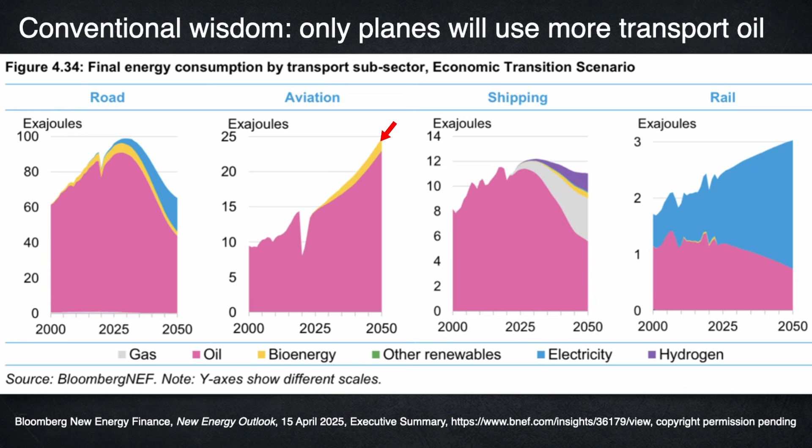So I'll explain why EP's emerging evolutionary pattern will at least closely rhyme with that of EVs just a quarter century later. That's contrary to the widely held view that aviation will use ever more oil while road, sea, and rail transport use less. In the second of these Bloomberg graphs, oil-based aviation fuel in magenta just keeps growing rapidly, and by 2050, it's only 7% displaced by bio-based sustainable aviation fuel in gold. But that projection assumes aviation fleet efficiency will rise only 8% by 2050, far slower than historically.

So let's see how to falsify this assumption and make the aviation graph look like the other three.

I'm originally a recovering physicist, but for the past quarter century, I've been a practitioner of designing super efficient vehicles, buildings, factories, and equipment. Each winter and spring quarter, through so far 15 iterations, Professor Joel Swisher and I teach an experiential course on how integrative design can make the energy efficiency resource several-fold bigger, but at much lower costs, and often with increasing returns.

That's because, as this paper shows, we use not more or fancier widgets, but fewer and simpler widgets, more artfully chosen, combined, timed, and sequenced. In 70-odd years of flying many millions of airline miles, I've also observed that airframe makers, although very skilled, could get better at integrative design.

What's their challenge? How far do airplanes need to fly? Well, long routes are scarce. Of the 2023 global emissions of aviation carbon, over half came from short trips on narrow-body or smaller planes. That's the dominant 4 aqua bars on the left.

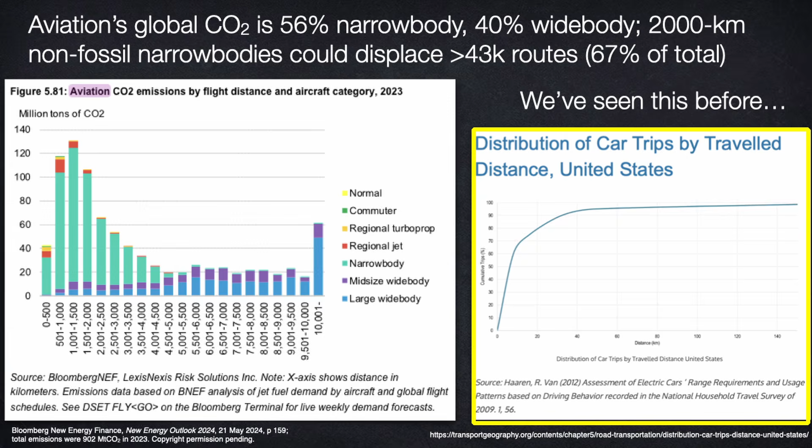The two-seat Roadster adopted electric drive in a lightweight Lotus Elise fiberglass and aluminum sports car, and that combination had an impressive 393-kilometer range, which made range a non-issue according to Car and Driver magazine.

But many customers still worried about range, and there were no fast charging networks to plug into. The 53 kilowatt-hour battery pack was also expensive. The powertrain was handmade, so in real terms, the sticker price was 4 times that of a modern 4-seat Model 3.

While providing ample range in practice to early adopters, Tesla needed time to build production volume and cut costs, and reduce the energy use per kilometer by 16% and raise the car's top range by 40% for the rare but important long-range trips, and also to store 42% more energy per battery pack kilogram.

So the dominance of short trips bought that time they needed, and now electric planes can apply the same strategy by starting with abundant short-haul markets and building out from there. However, unlike autos which ride on tires, planes need lift to stay airborne.

Most aviation experts assert that for electric flight to get off the ground, if it ever can, it will need battery packs to store 2 or 3 times more electricity per kilogram than the best battery packs in today's EVs, and yet stay safe, durable, and cheap.

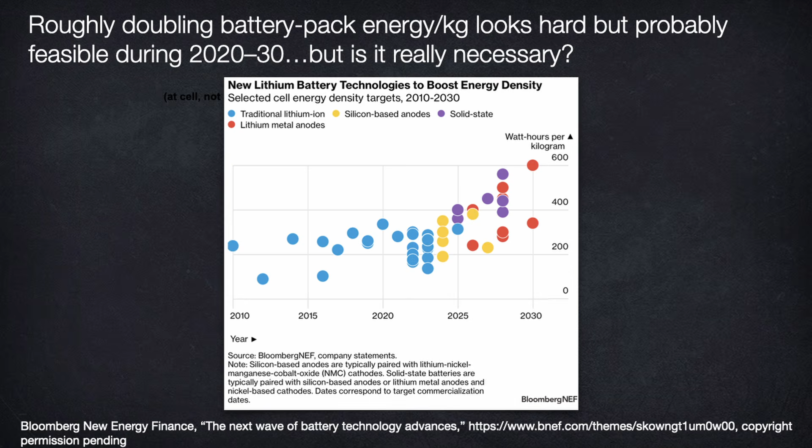That's not easy. It is authoritatively forecasted anyhow, but it comes from asking and answering, I think, the wrong question. It simplistically compares fuel with battery energy density and propulsive efficiency in today's aircraft, rather than redesigning the whole aircraft for electric propulsion. So it's a classic case of optimizing isolated components and thereby pessimizing the whole system.

But integrative whole system design of far more efficient airplanes can make the battery needs very much milder. This was explained 12 years ago in a remarkable technical paper by 2 distinguished NASA Langley aeronautical engineers. They say electric aviation propulsion has compelling differences that will fundamentally alter the way propulsion integration is approached.

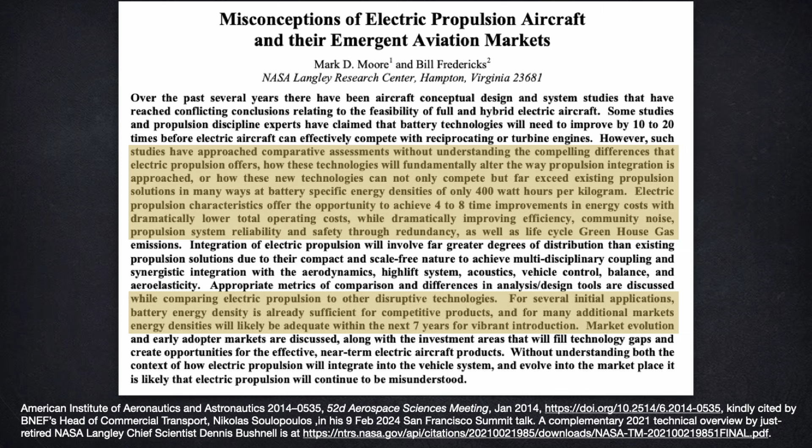Integrative design lets electric propulsion not only compete but far exceed existing propulsion solutions in many ways at battery-specific energy densities of only 400 watt-hours per kilogram, yielding 4 to 8-fold improvements in energy costs, they said, with dramatically lower total operating costs while dramatically improving efficiency, community noise, propulsion system reliability and safety, and of course, with zero greenhouse gas emissions if you power the planes with carbon-free electricity, which last year was 43% of world electricity and rising fast.

These authors also said that for several initial applications, battery energy density was already sufficient, this is 12 years ago, for competitive products in some entry markets, and for many additional markets, energy densities will likely be adequate within the next 7 years for vibrant introduction. That meant 5 years ago. So we'll see how that's going.

And they're right, because electric propulsion does not just produce thrust. It also creates new advantages, new degrees of freedom, transforming how the whole aircraft is designed. So you cannot compare propulsion systems in isolation.

The economics are also far better. The business opportunity is here and now, and thinking that it's far away risks grave disruption. I'm not implying here that battery energy density is not important, but rather that it's already adequate, as we'll see, if offset by whole aircraft improvements.

Batteries do cost and weigh more. They don't get lighter as they're drawn down. They need meticulous safety and certification.

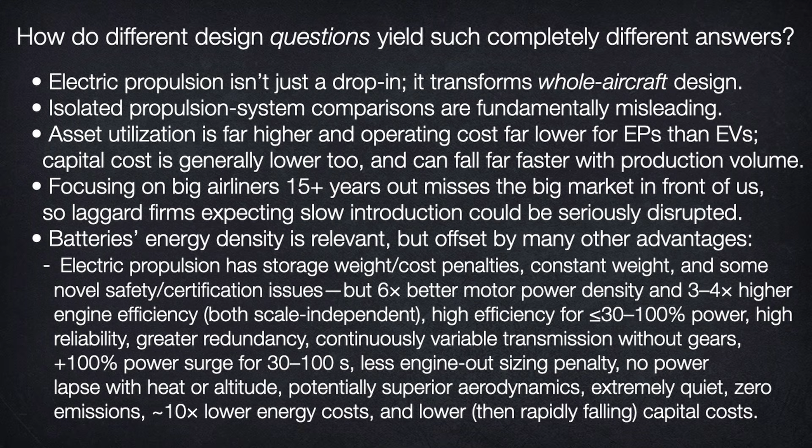However, electric propulsion has many offsetting advantages. It has a many-fold lighter weight powertrain and higher efficiency than fuels do, over a huge range of scale that invites distributed architectures, many small motors, not a few giant gas turbines.

Efficiency stays high over most of the power range. Torque rises, thrust is widely available without gears, energy for climbing can be largely recovered on descent. No combustion also means no intake air and no exhaust. Reliability and safety improve through greater redundancy, radical simplicity, and major power surge capability.

Noise and engine dependence on density altitude nearly vanish. Higher altitude is feasible. Maintenance shrinks. Emissions disappear. Energy costs, that is, price times use, fall by an order of magnitude. Capital costs shrink even more at low production volumes and can make electric airplanes better, safer, and cheaper than fueled airplanes. That's a lot of advantages.

So, bypassing technical details, I'm going to offer some simple examples and analogies illustrating this logic. And while I will address mainly energy efficiency, remember that economics merit equal emphasis.

There's a wonderful Volts interview, 19 June 24, with Dave Roberts, in which the leader of one of the best electric airplane companies called Beta, Kyle Clark, said two novel things.

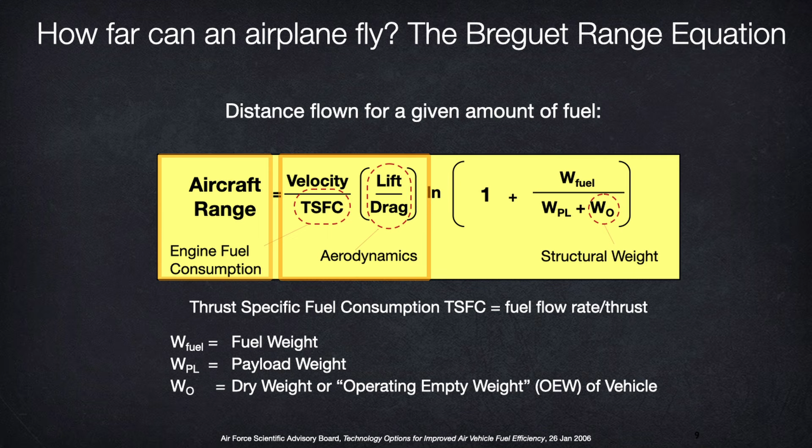Airplanes' fuel efficiency is proportional to three things: engine efficiency, which is the reciprocal of fuel use per unit thrust; aerodynamic efficiency, measured by the ratio of lift to drag; and a logarithmic term based on the ratio of fuel weight to gross weight, which is structure plus payload. That third term is needed because the plane gets lighter as it burns fossil fuel, which turns into about 6 or 8% of climate change. So putting aside fuel burn and other complexities, the three prime variables are propulsive efficiency, aerodynamic efficiency, and mass efficiency—or you might summarize as thrust, sleekness, and lightness.

However, these three all interact, sometimes favorably, often not. Their interactions are complex; they need a full systems analysis. So the many technology and design opportunities I'll mention do not simply combine in a real aircraft at the systems level, nor do they combine simply across a full mission profile that includes not just cruise, but also conditions like takeoff, landing, and maneuver. Keeping that caution in mind, now back to the story.

Planes travel about 10 times faster than cars. For both of them, aerodynamic drag rises as the square of speed. Also for both planes and cars, reducing weight is crucial. Of course the numbers differ for planes and cars, but ultralight weight plus low drag crucially enables non-fossil fueled propulsion of both kinds of vehicles.

So let's start with the automotive physics analogy, and I'm going to riff back and forth a lot between cars and planes. Just 1/5 of a modern non-electric car's fuel energy reaches the wheels and moves the car. Of that tractive load, almost half, rising as the cube of speed, heats the air that the car pushes aside, and most of the rest heats the tires and road. Only about the last 6% of the fuel energy accelerates the car and then heats the brakes when you stop.

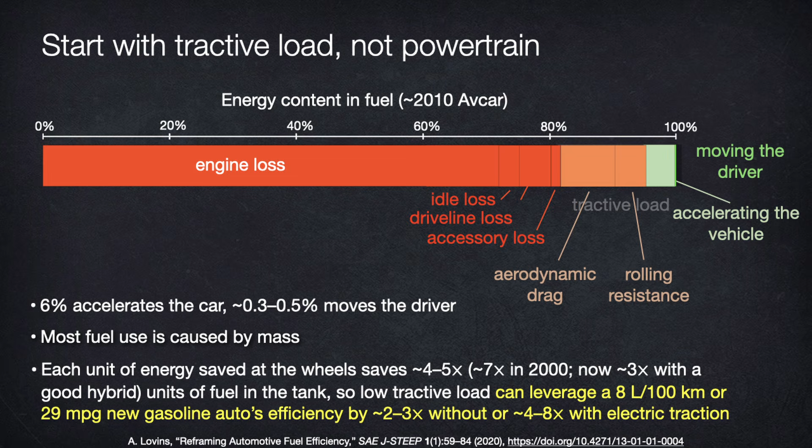Now, automakers cut losses mainly in the powertrain, where the big losses are—the red stuff. That's harder than reducing tractive load, and it's far less rewarding, because saving 1 unit of energy in the powertrain saves only 1 unit of fuel in the tank. In contrast, saving 1 unit of energy at the wheels avoids 3 or 4 additional units lost in getting that energy to the wheels, so you're leveraging 4 or 5 units of fuel saved at the tank.

Thus, we can double or triple efficiency in a fueled car without changing how it's propelled, or we can roughly quadruple to octuple efficiency by combining low tractive load with electrification. The Electric Power Research Institute found that making EVs more efficient before they're electrified can cut U.S. costs of electricity, grid, and recharging infrastructure by more than $200 billion a year. So we should first reduce tractive load, then improve the powertrain, and then the powertrain shrinks for the same acceleration—F equals ma, less m, less a. That saves more mass, and it also saves capital cost to help pay for the lightweighting.

How can that lovely synergy work in practice? Well, let's look at the carbon fiber car that I drive. It is 55 kilograms lighter than a 2-seat 2009 Tesla Roadster. It was profitable from the first unit that BMW sold in 2013, and for all 250,000 units sold over the next 9 years, including mine. It's made from carbon fiber, which automakers had rejected as far too costly.

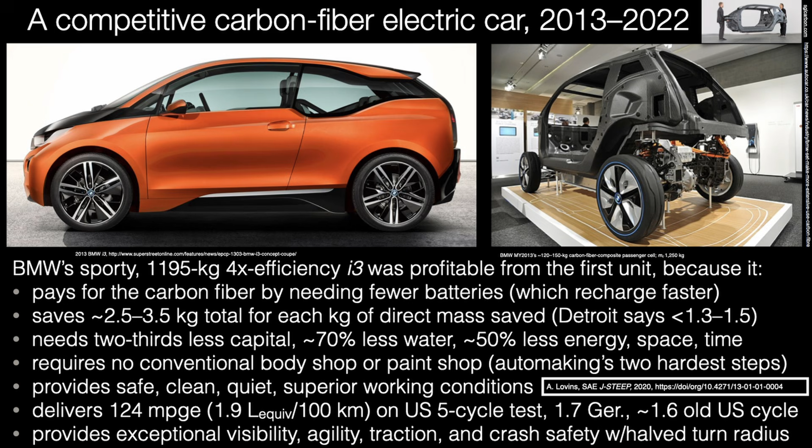But its carbon fiber was paid for by needing fewer batteries, the most expensive part of an EV, to move less mass. Also, fewer batteries recharge faster and need less electricity and less infrastructure. So the roughly 300 kilograms of saved weight then snowballed spectacularly, saving about 1.5 to 2.5 kilograms of secondary weight for each kilogram of saved primary weight. Part of that, of course, is the saved batteries.

The assembly of this car saves 2/3 of the normal capital and water, and half the energy, space, and time. It also eliminates the 2 hardest steps in automaking. It's much better for workers. It quadruples efficiency without compromise and with many driver advantages, of which my favorites are greatly improved visibility and half normal turn radius—really handy in the city. Now, this design logic could also save up to 2/3 of the scarce battery minerals, and then there are 5 other multiplicative forms of efficiency that can manage the rest.

BMW finished producing this model in 2022. There are calls to resume production, and if they decide not to do that, I suggested they give the tooling to Ukraine, which will know what to do with it.

Meanwhile, Bloomberg New Energy Finance says that China's strategy for its 2030 flagship cars includes carbon fiber structures displacing 4/5 of the iron and steel. If that happens, it could flip the whole global car industry. China already makes impressive EVs priced as low as $5,000 or $10,000. So if China designed out another half to 2/3 of the costliest ingredient, the batteries, in its EVs, automakers elsewhere would have to follow suit or give up a lot of market share.

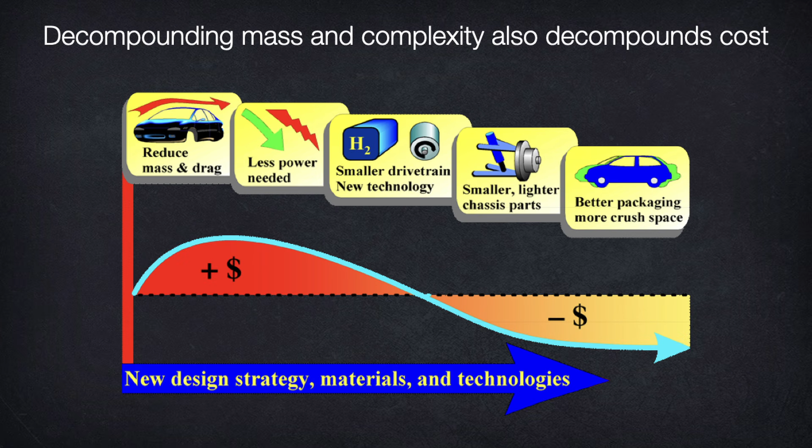So at first, the special materials and powertrain and design might seem too costly, the red part on the left, but after many recursive cycles of mass decompounding and simplification, you need so little carbon fiber and such a small powertrain that with the simpler manufacturing, the total cost can revert to normal or even less. Of course, I'm talking here about cost per car, the way we buy cars, not cost per part, not cost per kilogram, which is how many automakers still mistakenly think about cost. I don't know anybody who buys cars by the kilogram.

Now, aerospace designers are a lot more sophisticated about saving weight, but often not yet enough, and not only about weight. I once asked a room full of the best designers at a top airframe maker, what's it worth, whole system, end-to-end life cycle cost of ownership, to take a watt of electric load out of your airplanes? Half of them didn't know the number, but they were sure someone else in the company did. The other half scratched their heads a bit and said, actually, nobody in the company knows that number because we never asked that question before. It's an important question, it's complicated, and we better figure it out. Well, based on the planes I fly in, I think they still need to figure it out.

Now, strong lightweighting takes radical simplification. So let me tell you a story. Tesla's original Roadster had a 2-speed gearbox, and it kept blowing up because it couldn't deliver both 0 to 60 miles an hour in 4.6 seconds and the top speed of 125 miles an hour.

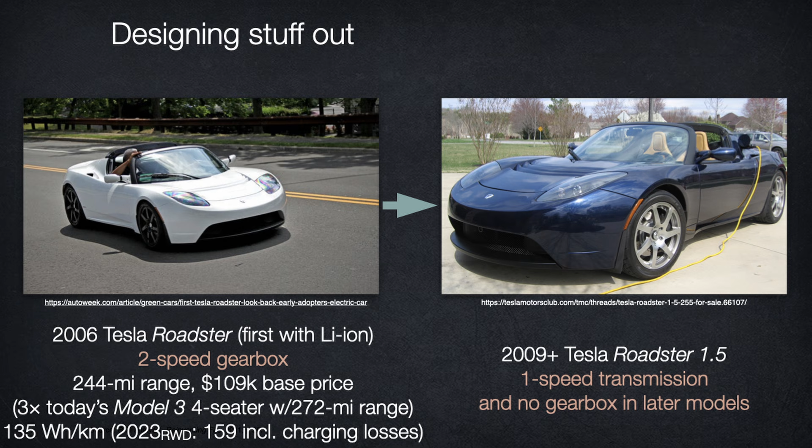So after 2 good gearbox manufacturers failed on this task, the chief engineer, J.B. Straubel, was griping one day. I said, I think the right answer is probably no gearbox, just a single-speed reduction gear. So he thought it over, and one day he came in and told his team, let's insource this problem to our core capability. We're electrical engineers. If we can make our motor produce 1/3 more torque, then we won't need the gearbox, and then we'll tweak the power electronics and software to match.

And they protested, well, the motor's going to overheat, and you'll have to Band-Aid on some Baroque cooling system. He replied, don't worry, we'll figure out what's getting hot and give it better conductivity or a bigger cross-section. And so was born the 2009 Roadster 1.5.

Eliminating that gearbox gained 16 kilometers of range, over 6 kilograms lighter weight, 30 kilowatts more tractive power, less noise, less maintenance, less warranty cost, and 3-digit fewer manufacturing dollars in an industry that will proverbially kill for a nickel. This little story and its competitive implications later triggered a major U.S. automaker's electrification revolution.

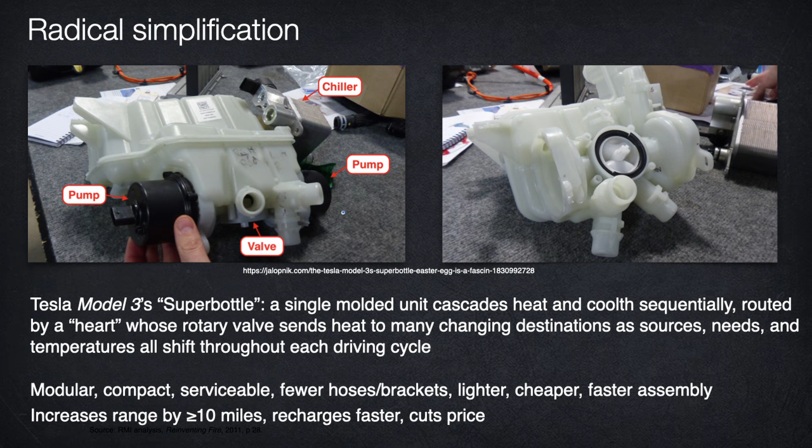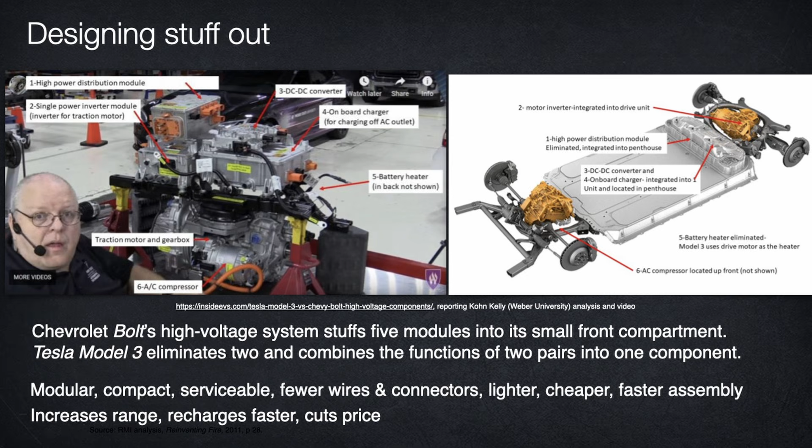The same relentless pressure for simplification is now overcoming automakers' tendency to equip components with individual heating and cooling systems or forests of hoses. So the Tesla Model 3 instead uses a single molded plastic heart whose 4-way valve redirects thermal energy in real time from where it is to where it's needed, optimally sequencing and cascading temperatures. Likewise, of 5 separate power-related modules in the Chevrolet Bolt, stacked together, Tesla's Model 3 eliminates 2 and consolidates 2 more into other modules, radically simplifying the system and achieving the same familiar suite of benefits. Airplanes offer similar opportunities, often more so.

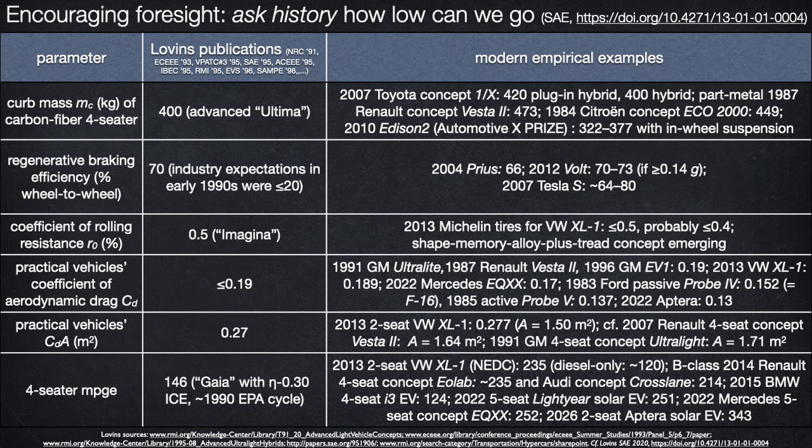How low can the tractive load of automobiles go? Here's a table from a 2020 Society of Automotive Engineers paper I did called Reframing Automotive Fuel Efficiency. It shows how my early 1990s analyses of 6 critical platform parameters, inferred from historic data on concept cars and components, predicted what efficiencies production cars should be able to achieve by right around now. Those empirically grounded estimates were heavily criticized at the time, but a third of a century later, they are eerily close to market offerings, and their bottom line efficiency far exceeds what I estimated in the 90s.

This kind of over-the-horizon radar signal is vital if you want to substitute accurate technological foresight for marketplace shocks. So I think collecting weak but real signals like this can enable some pretty accurate inferences about future aviation, since whatever exists is possible. Let me offer you some further examples to build on that idea.

Remember how saving automotive energy by taking out mass or drag leverages much bigger fuel savings at the tank? That's also true in planes, and it's even more valuable. With a 40-odd% efficient jet engine, each unit of mass or lift-to-drag ratio that you save in the airplane saves more than 2 units of fuel directly, and then even more with mass decompounding, which in 2020 was estimated as commonly a factor around 4 or 5.

This multiplier also raises the value of saving onboard electricity. Even a quite efficient 787, drawing about 400 kilowatts of electric power at cruise, is not yet fully optimized. Optimization for full whole system life cycle cost, or value, might show, let's just make up an example, that maybe replacing a $20 coffee pot with a $200 vacuum super-insulated internal element coffee pot might save thousands of dollars worth of fuel each year. Boeing estimated that optimizing electric loads might add a couple of percentage points to the 787's roughly 20% gain in fuel efficiency, and even more when smart wiring and power management save a lot of heavy, complex wire.

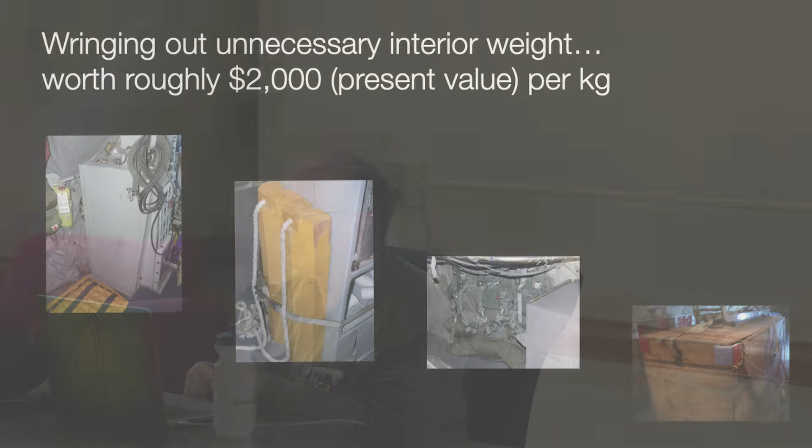But I wouldn't dream of providing, say, thermal comfort in a building the way we do in airplanes. And we still have a long way to go with some fundamentals like taking out weight, even operational weight that's not built into structures. Taking a kilogram of weight out of a typical airplane is worth about $2,000 in present valued fuel cost, and that's at the fuel price before the Iran war. It's worth even more on long flights, where each liter you want to land with requires another half to 1 liter to carry the first liter across the Pacific.

Once I was hitchhiking on a KC-135R military tanker, and I noticed a lot of heavy objects that didn't need to be there. Next morning, I briefed my observations to a couple of Air Force 2-stars. That afternoon, they launched a treasure hunt. It promptly found $2 billion worth of weight savings and hence fuel savings in that aircraft class, and then over $10 billion in all heavy aircraft classes. That's weight that nobody had been responsible or rewarded for noticing and taking out.

Likewise, as an airplane passenger, I notice uneven attention to weight. They sweat the details of lightweight toilet paper and lightweight magazines, or take those away, but they overlook really heavy tray tables and, until very recently, heavy galley carts. Airframe makers could do a lot more with basic structural weight, too.

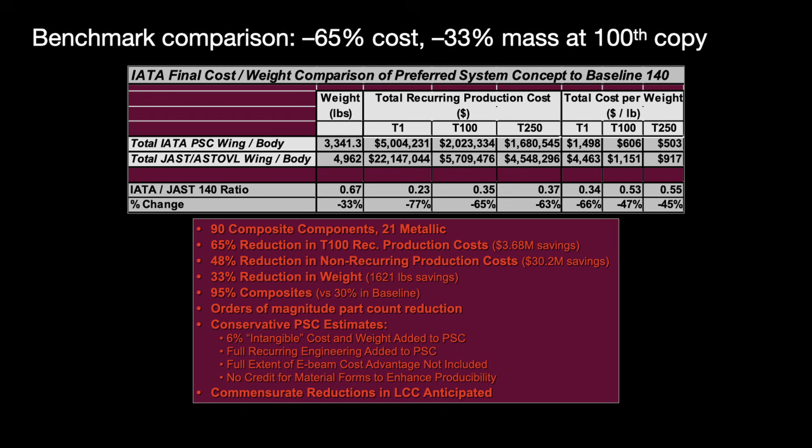Our lightest passenger planes are still only about half carbon fiber composites by mass. But 3 decades ago, Dave Taggart at the Lockheed Martin Skunk Works led for DARPA the design of a 95% carbon composite advanced tactical fighter airframe that was 1/3 lighter but 2/3 cheaper than the 72% metal base design for this Joint Advanced Strike Technology, later called the Joint Strike Fighter. Here's a closer and flatter look at it, and here are some of the benchmark numbers. This is a 735 kilogram lighter airframe with 3 or 4-fold lower production costs. That showed, as BMW later did for cars, that ultralighting doesn't need to cost more, and it may cost less.

And the cost would be even lower today because the leader of the Skunk Works project then moved to RMI in 2000 and led our hypercar spin-off's development of a cost-effective SUV with half the normal weight and 4 to 6 times the normal efficiency. And a team led by another RMI engineer at that spin-off, Dave Kramer, now longtime head of advanced composites at Apple, where BMW's i project leader then led the Titan car project.

So that team at RMI later developed our carbon fiber midsize SUV, which we called Revolution, and its airframe-inspired body, suspended from rings, not built up from a tub, had just 14 parts, each made with one low-pressure die set, saving 95 to 99% of the tooling cost.

Each part can be lifted in one or two hands with no hoist. The biggest part, the side of the car, I can briefly lift with one finger, and the parts then snap precisely together for bonding, self-fixturing, detolerance in 2 dimensions, so you don't need the robotic body shop. By laying color in the mold, you can nearly eliminate the paint shop. So there go the 2 hardest, costliest steps in automaking, saving about 80% of the manufacturing capital. That plus the 2/3 smaller powertrain pays for the carbon fiber, making the ultralighting approximately free.

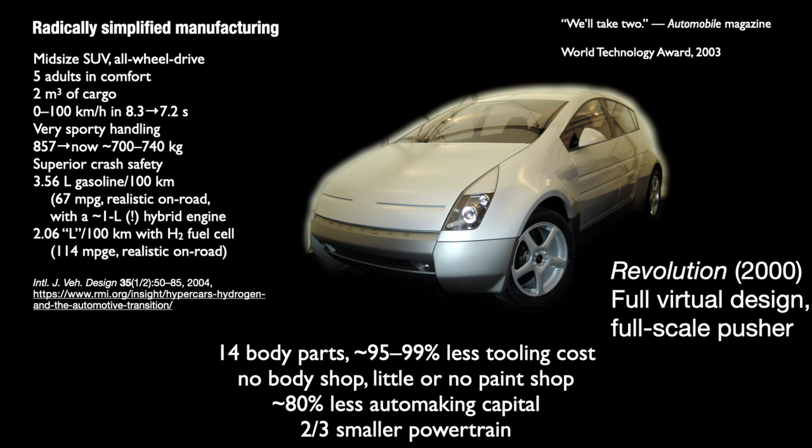Now, this car design was stage 2 of an effort at RMI to revolutionize the global auto industry. Stage 1 had developed my hypercar concept around 1990-91, initially validating it with GM and other automakers. But after a couple of years, it became clear that GM was culturally unready to collaborate, especially with a small nonprofit. So RMI's board told us to take the concept out to the whole industry.

So we did something a little sneaky in 1993. We open sourced it. We made it free like Linux software. Hard to beat free. And then I got most of the world's automakers worried that their competitors would do it first. By 2000, that tactic had leveraged our $2 or $3 million of philanthropically funded R&D investment into more than $10 billion of industry commitments.

It sped up the Japanese hybrid releases, Honda's Insight and Toyota's Prius, by, they told me, close to a decade, and it got serious lightweighting efforts underway. And then our hypercar spin-off's 2 Tier 1s designed Revolution. Unfortunately, we sought production capital in November 2000 just as capital markets collapsed. Bad timing. But our design intrigued and inspired automakers.

So as you saw in 2013, 20 years from our open sourcing, our Fiberforge manufacturing process entered the supply chain, and BMW, our #1 target of influence, sold the first hypercars, which I've been driving since 2016.

Now, this Revolution SUV we designed had what came to be called Gen X, Gen Y, active outdoor lifestyle luxury crossover styling. It could carry 5 big adults in comfort, plus up to 2 cubic meters of cargo. It could haul a half ton up a 44% grade. If you fold down the right-hand seats, you could carry 2 adults and 2 standard kayaks inside. And being half normal weight, it could accelerate 0 to 60 miles an hour in 7.2 seconds with a 1-liter hybrid engine.

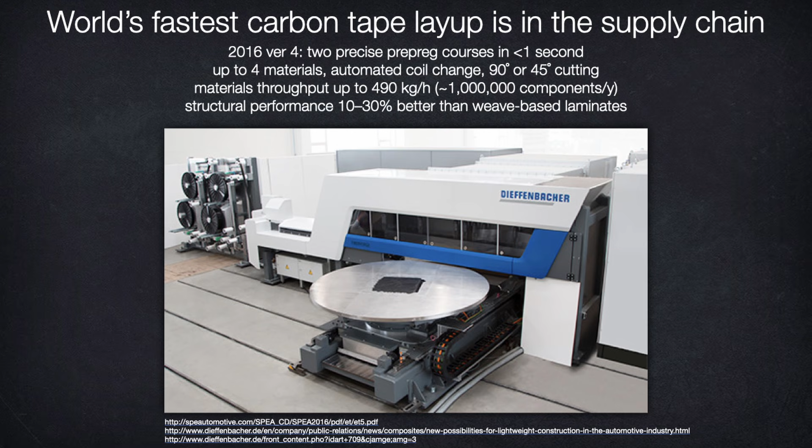I mentioned this technology just in case you think that making advanced composite airplanes and their structural components has to be small and costly.

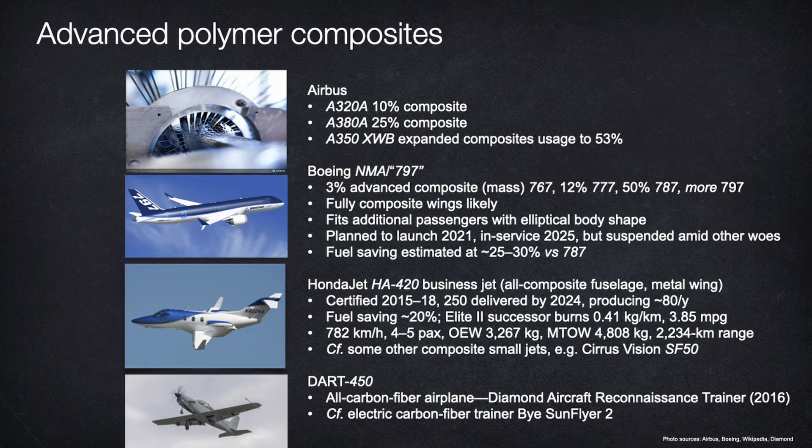Advanced composites are slowly and incrementally displacing metal. Current trends include carbon fiber wings, elliptical fuselage forms like a 787 passenger compartment on top of a skinnier 737 size cargo hold, so you can fit in more seats with less drag and less weight. But a lot of components are still made of metal that shouldn't be, and the barriers are not mainly technical or economic, but cultural. Radical designs like that 95% carbon composite Joint Strike Fighter airframe require revolutionary design mentality, designing in the future, not in the past.

When the Soviets shot down Francis Gary Powers' U-2 spy plane in 1960, Kelly Johnson, who ran the Skunk Works, did not say, 'I'm going to design a slightly better U-2.' He said, in paraphrase, 'I want to own the skies for decades, so we'll design a Blackbird SR-71. I don't know how, but we'll figure out.' And they did. It took about 13 months.

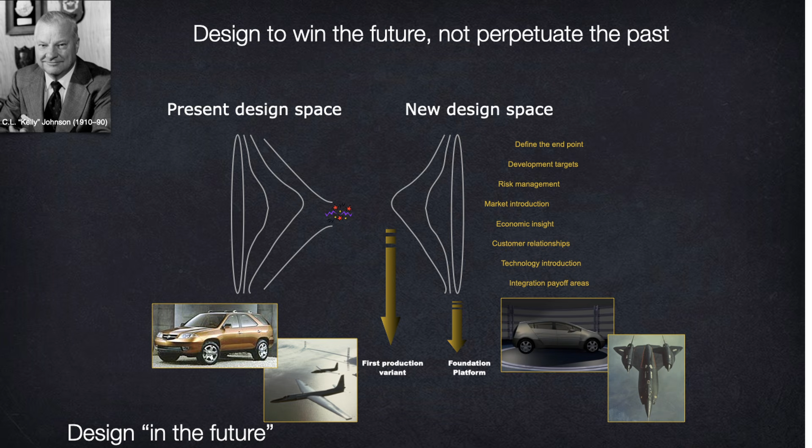Johnson understood that such an airplane was impossible within the conventional design context, because design is like a rubber band. If you try to stretch it too far from the conventional design space, you encounter more and more resistance, and eventually it breaks. But if instead you jump to the new design space you aspire to, then you can stretch the rubber band back to fit technologies not yet ripe, and then as they mature, the rubber band relaxes to where you want to be.

Ultralighting requires not just smart and uninhibited designers, but also organizing them differently. Dave Taggart brought us from the Skunk Works our Revolution SUV's design process. We had 7 engineers all sitting around the same table, collectively responsible for dauntingly ambitious whole vehicle requirements that the industry had no idea how to meet.

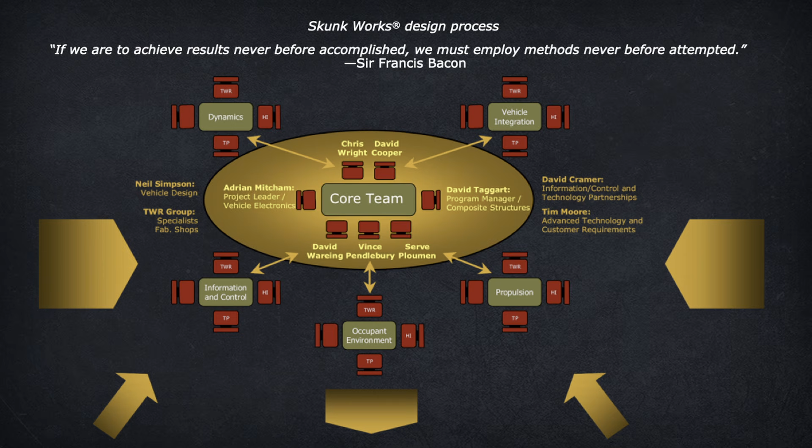Each engineer also owned one major vehicle system or function. Here's the trick: for those, we deliberately wrote no requirements because we didn't want him to make his problem into her problem. We wanted to make the whole team design a highly integrated vehicle together. So 2 engineers were not comfortable without their very own requirements. We replaced them in the first week or 2, and then it went great and we got the intended result.

Toyota asked us how we did it. We told them. In 2007, out came the 70% lighter 400 kilogram carbon fiber hybrid concept car they called the 1X, 1 over X. So you see the ultralight carbon fiber electrified hypercars that I invented 35 years ago, we designed with industry 26 years ago, developed design methods that Toyota used 19 years ago to design that 1X.

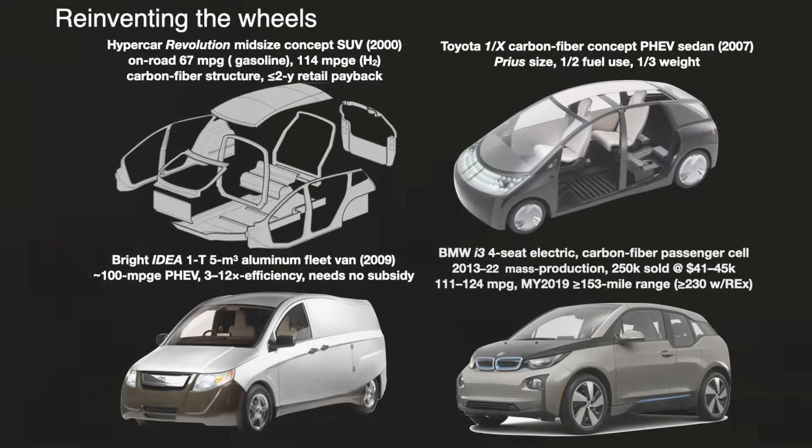Similar methods entered the market in 2013 with that popular and profitable BMW i3 you saw. But even 1-ton lightened aluminum fleet vans like this hybrid that another RMI spinoff developed and road tested in 2009 could save a fifth of U.S. auto fuel at lower life cycle cost with no subsidy. And carbon fiber autos made in our simplified way at normal cost could save more oil than Saudi Arabia lifts.

At an extra cost that a decade ago was under $18 per saved barrel, today it's close to $0 or less. 2/3 of the EVs made in China last year are already at or below sticker price parity with steel internal combustion engine cars. So they save oil at negative capital costs, and so do 2 popular U.S. electric vehicles.

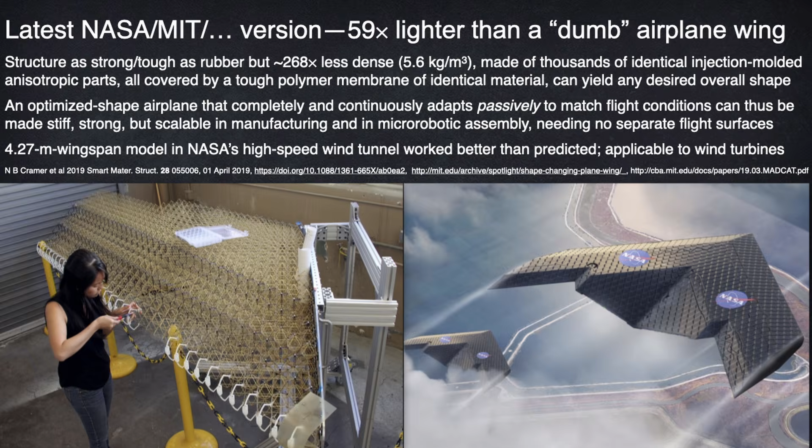Aeronautical structures could be made in radically different ways that Kelly Johnson would have loved, leapfrogging past the bulk advanced composites you've been looking at. 7 years ago, MIT Center for Bits and Atoms introduced a flexible lattice structure, illustrated on the left by this 4.3 meter test structure, which is 59 times, not 59%, less dense than a typical metal aircraft wing. This kind of structure has the strength of elastomers, but the gossamer density of aerogel. It can also eliminate movable flight surfaces because every part of its entire shape passively adapts to optimize continuously for real-time flight conditions like a bird's wing.

So thousands of such identical anisotropic molded polymer little cells, ordinary engineering plastics like ABS, can be assembled by swarms of programmed robots or grad students, whichever are cheaper, into an airplane of any desired shape. This cutting-edge technique, lattice and membrane, opens revolutionary prospects for lightweighting, aerodynamics, and cost reduction. It's been prototyped as an airplane for Airbus and as a car for Toyota. You could even make it into a vacuum balloon, buoyant but crush-proof in air, and a big vacuum balloon could lift 24 times the payload of a jumbo jet.

Alternatively, these hooked-together miniature structures are as strong and stiff as solid structures, but they're up to 90% air. They don't even use carbon fiber. After carbon fiber could come Miralon's or Dexmat's carbon nanotube structures with up to 10 times higher mechanical performance. And now we can make similar nanotubes from sugar, water, and sunlight via the bacterial enzymes that hummingbirds use to weave their nests.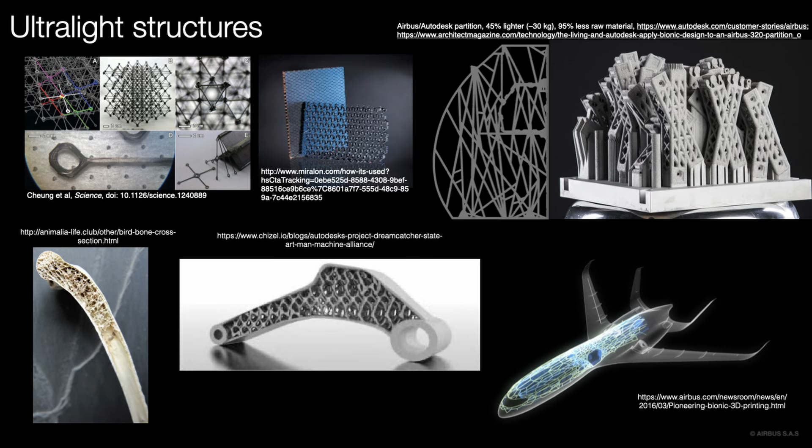As usual, nature has done all this before. And there are firms like Nanocomp Technologies that already make strong ultralight carbon nanotube electric conductors to displace the heavy copper wires in satellites and in aircraft.

Extinct pterosaurs, the biggest flying creatures in the history of life on Earth, had wingspans up to 10 or 12 meters, 3 times the biggest living thing that flies today. That's thanks to bones with paper-thin walls stiffened by internal struts. Complex porosities made the bones much lighter, slightly bendier, and able to combat and heal cracks. So there's now a field called paleobiomimicry, applying designs from a sixth of a billion years ago to improve today's aerospace structures.

Now, of course, airplanes have long been getting more efficient. Models that the U.S. certified from 1960 to 2000 cut fuel intensity by 70%, half from better engines, half from better airframes. And that progress remains on such a steady and plodding course that Boeing's NMA, or 797, was expected to hit in 2025 exactly the efficiency bullseye we had estimated in 2004.

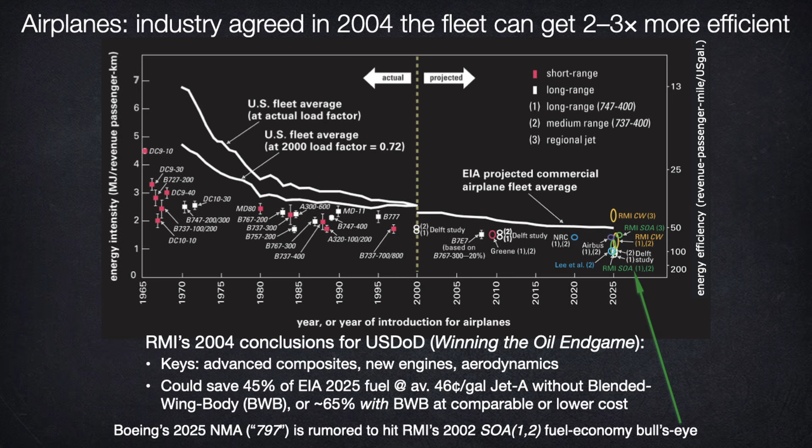But uncertain and often cash-flowed customers, incremental thinking, restricted vision, market turbulence, and then Boeing's deculturation make the industry's trajectory too slow. We're raising efficiency just by 20% per generation. At that rate, it could take another century to do what we knew how to do a decade ago. By then, we're cooked, and aviation is doing 6 or 8% of the cooking.

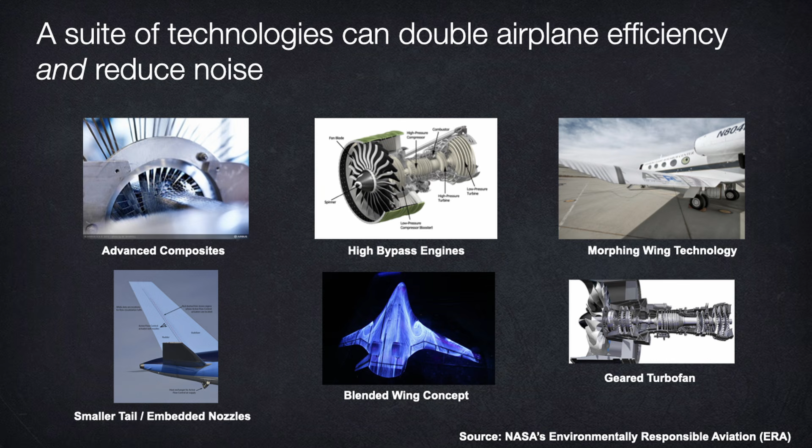Now, next generation options are well known, effective, and profitable. Advanced composites will lighten aircraft by at least another 20% and enable the elliptical fuselage. Morphing wing technology can save over 10% of fuel in new clean sheet designs, or over 3% in retrofits, and cut noise 10 decibels. Geared turbofans can be 15% more efficient than conventional jet engines. Blended wing body designs can often save over 40% if we change manufacturing and the boarding and deplaning operations.

And a lot of other available innovations get powerful in combination. Back in 2013, NASA did a roadmap showing 50% fuel savings from the 2005 baseline as being available by 2020, and 60% savings by last year, as shown in the right-hand yellow column. But airframe makers moved much slower to adopt these pretty obvious technologies.

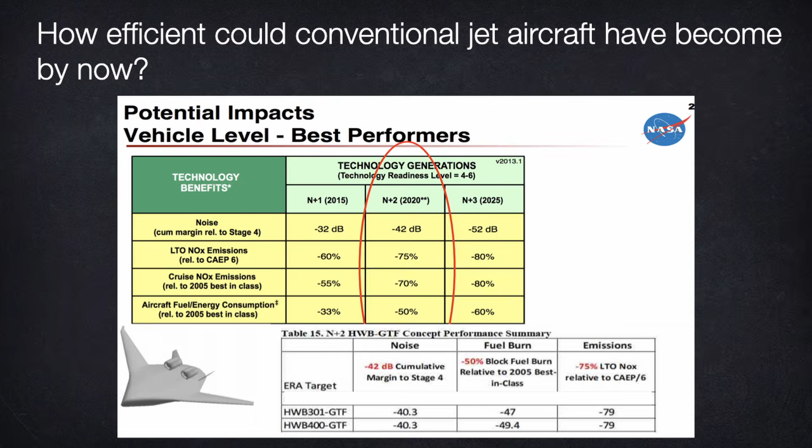And just to make this real, designs like these illustrate how more ambitious combinations of current technologies can boost the U.S. fleet's efficiency cost-effectively by 3 to 5-fold over the 2005 level. The upper three designs are from Boeing, NASA, and MIT, more than a decade old. The lower three are a few years old. Both sets can save 50 to 80% of the fuel versus 2005 best-in-class or versus today's fleet.

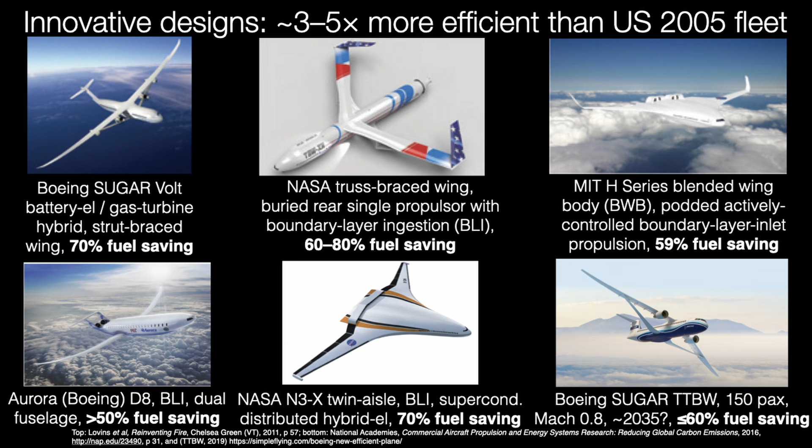They use strut-braced or truss-braced wings, riblets, and other surface treatments like shark skin, advanced composite structures, hybrid electric propulsion with gas turbine-assisted takeoff and range reserve but electric cruise, podded or buried propulsors, boundary layer ingestion, some blended wing body designs like the one in the lower middle, and other expanding innovations.

The then chief scientist of NASA Langley, Dennis Bushnell, told me 7 years ago that just proper application of truss-braced wings with advanced aerodynamics can raise the lift-to-drag ratio from about 18 or 19 with tube and wing designs we fly today, or 22, 23 with blended wing body, to 40 or 60 or more. So 2 or 3 times better than today's fleet, while continuously reducing weight.

There's a Swiss laminar flow wizard named Werner Pfenninger, who even designed lift to drag as high as 100, nearly 5 times current norms. Bushnell suggests further adding other refinements like thrust vectoring from fully aft propulsors to eliminate the tail, and replacing landing gear and heavy brakes, which total on the order of half the fuselage weight, with lower impact automatic landing and deployable parachutes for refused takeoffs.

So there's still a lot of hidden treasure. And even simple changes can be effective.

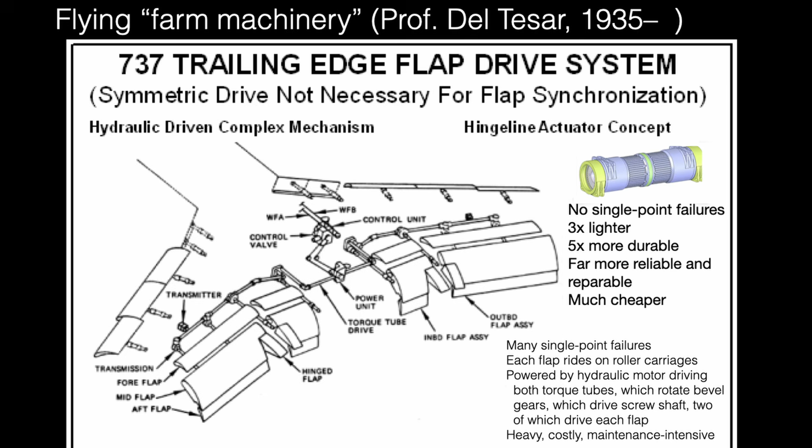Sometimes if I'm on an old plane, I look out the window as it lands, and I've seen the flaps extended by a hydraulic and mechanical system that the wizard of electric actuators, originally a farm boy gearhead, rightly calls farm machinery. It's heavy, unreliable, costly to buy, costly to maintain. It does not belong in an airplane. He would replace it with a 5-fold more durable, far more reliable and reparable, and much cheaper hinge line electric actuator that cuts the overall system weight by 3-fold.

Next, we can eliminate hinged flight surfaces. Like the Wright brothers' bendable canvas and wood, flight surfaces can now morph in real time to adapt to flight conditions, leaving the surface and the airflow smooth, as in these two methods.

The first method has entered the supercar market in front and rear wings that morph to maintain downforce at any speed. There's an Aston Martin that does that. It's also expected to save about 2 to 11% of the fuel in planes. The Air Force has committed to deploy it on several hundred planes as soon as they get through the flight tests. And the second method uses the lattice and membrane structure that you just saw.

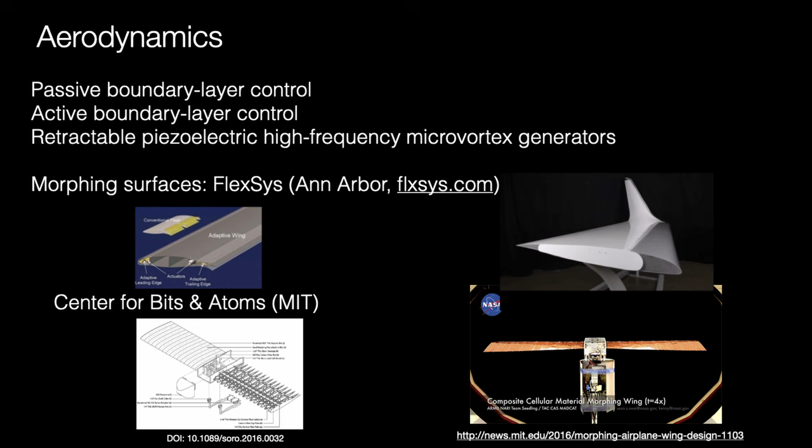And actually, nature is very rich in great aeronautic designs like this tropical cucumber seed that can glide for hundreds of meters. Not to mention the California condor. Besides all its advanced geometry, structures, and controls, I especially like the fully integrated system design and advanced manufacturing techniques.

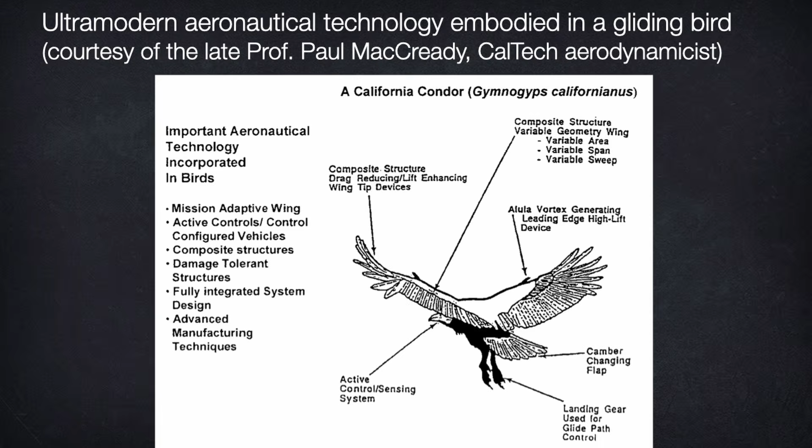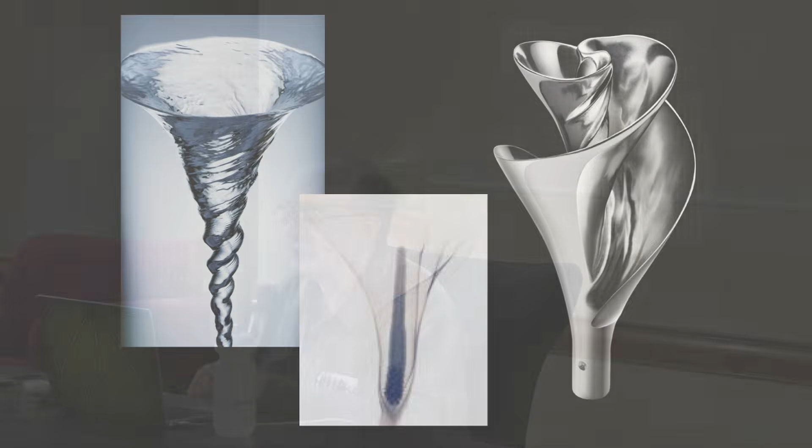Now, can biomimicry raise propulsion efficiency? An Australian naturalist and sea captain buddy of mine, Jay Harman, imitates the Fibonacci structure in natural vortices, like that running out the bathtub picture on the left, to make super efficient pump and fan rotors on the right. That tulip-shaped rotor can spin underwater at thousands of RPM with no cavitation.

Now, your body has on the order of 100,000 kilometers of fractal blood vessels. And if they had the design and friction of standard industrial piping, you would need a heart bigger than your body. Very inconvenient. But your third of a kilogram, 1.5 watt heart suffices because your bloodstream uses laminar vortex flow. Airplanes don't use it yet. They should. Disclosure, I own about 1,000th of the company here.

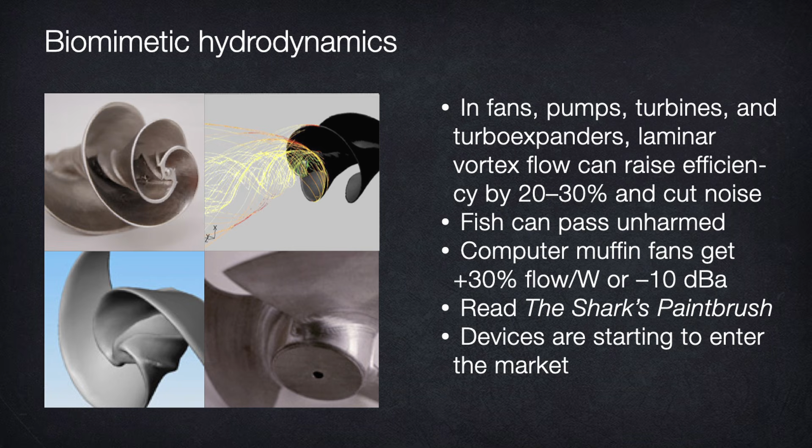Now, such rotors can empirically raise pump and fan efficiency by 20 or 30%, not quite violating the pump equation, and computed and observed pump behavior now match up nicely. Some of PAX's diverse super-efficient fans, propulsors, winglets, and hulls are now on or entering the market, and remarkably, this is a real head-scratcher, their efficiency gains are independent of scale and independent of Reynolds number.

So for air as for water, cheaply converting standard fuselage airflow to laminar vortex flow or toroidal flow regimes by adding a Fibonacci spiral of little vanes running back from the nose can cut drag, and in one early torpedo trial can cut it by 14%.

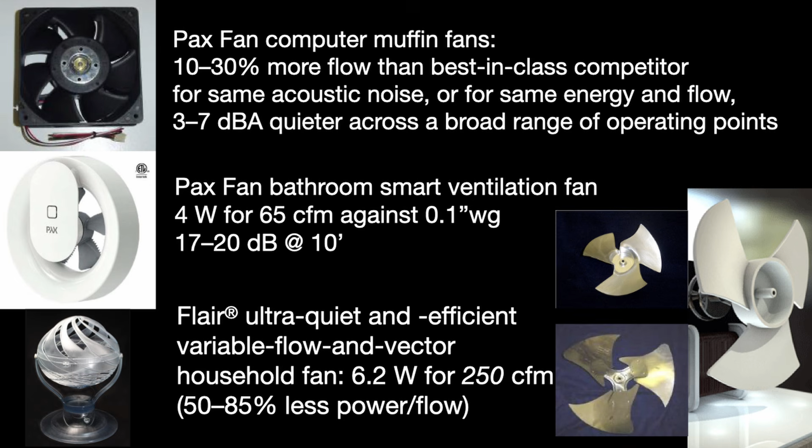PAX's household fans are a lot more efficient and quieter than conventional ones. The latest one at the bottom uses 50 to 85% less power per unit of flow than its competitors from good firms like Holmes, Vornado, and Dyson, and provides higher air velocity with far less noise. Gee, I wonder if its principles might yield more efficient propulsors.

Safran and GE's joint venture CFM International is testing an unducted or open rotor with one rotating stage and one stage of non-rotating variable pitch blades. Bypass ratio over 70 versus 10 for the giant 777 engine with its carbon fiber blades, and a 20% fuel savings expected in service by the mid-2030s to late 2030s. I wonder if such designs might benefit from subtle Fibonacci shapes like Harman's biomimetic fan blades.

Or there's another suggestive innovation, rediscovering a 120-year history with over 160 patents. That's the award-winning toroidal propulsor for quiet drones developed at MIT Lincoln Lab, mainly by an intern. They were working on ring wings. That's an old concept said in the patent to improve lift to drag by 40 to 60% compared with the linear wing. You see, about 35 or 40% of the drag of a typical aircraft is due to vortex formation at the wingtips. But the toroidal propulsor has no wingtips.

It wraps back into itself, and it may weigh more or maybe less per unit thrust, depending on materials. Now it's being mass-produced for quiet drones—guess who wants those? And variants on the 1924 Prandtl box wing, like the C-wing, also merit attention.

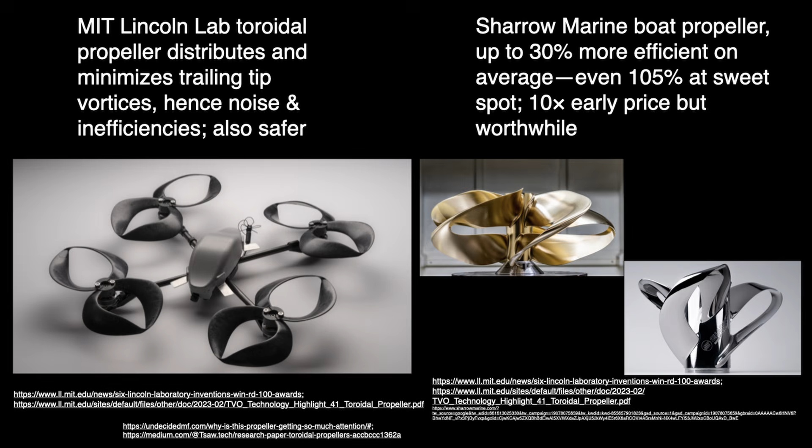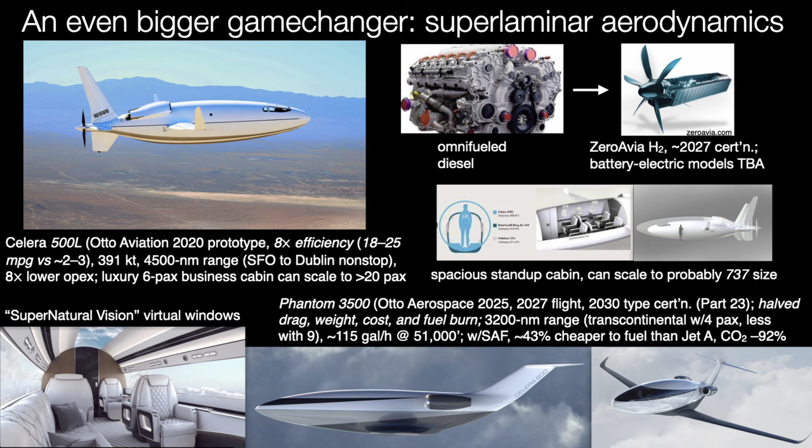Okay, now let's combine lightweight with advanced aerodynamics. 5 years ago, I visited an ex-Los Alamos physicist, Bill Otto Sr., and his team. He'd been chief scientist avionics for the B-1 bomber.

And since 2007, his firm was developing this radically optimized plane, demonstrating 59% lower drag than a standard business jet, thanks to highly laminar flow over practically the whole fuselage, wings, and tail. And all the critical areas have no rivets, no seams, no gaskets, no gaps.

So this initial design, with just a 52-foot wingspan, aimed at type certification by last year as a $5 million business plane with a stand-up cabin height of 6'2", longer range than a 737. They did 3 years of flight tests, and then they decided to leapfrog to bigger models.

And that superlaminar flow they demonstrated is clearly feasible in regional jet size, and as Airbus work suggested, probably up to about 737 size. But all sizes could blow up aviation business models like hub and spokes, because smaller, cheaper planes are perfect for rapidly emerging point-to-point route architectures, serving any of over 5,000 U.S. airports.

Now, this plane on the left had an initial engine that was a 500 horsepower aluminum turbo diesel, Russian designed, German made, burning any fuel, including 100% SAF, but that's not the only option.

4 years ago, Otto Aviation confirmed plans for a mid-sized 2027 version powered by a ZeroAvia hydrogen fuel cell system. That powertrain's already flown in a 19-seat test bed. It's been tested as one of 2 engines in a Dash 8 turboprop, and its operating economics should beat even the ultra-cheap diesel due to even lower drag, less propulsion system maintenance, cheaper fuel.

Benefits compound. Greater lift-to-drag ratio reduces fuel volume and fuel weight for a given range. Less fuel means smaller wings, smaller powertrain, smaller structures. So a 30% drag reduction compounds into a 60% fuel saving.

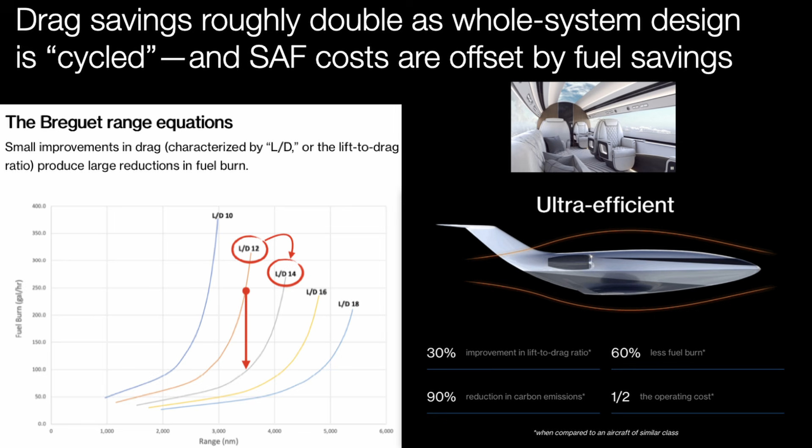Moreover, sustainable aviation fuel's higher price is more than offset by fuel savings. So you could get carbon reductions upwards of 90%, and probably 50 to 90% reductions in ultrafine particle emissions, better than free. The expected carbon emissions, even on Jet A, are virtually identical to those of common electric road vehicles.

And the panoramic digital windows, which they call supernatural windows, save weight, improve laminar flow, promote thermal and visual comfort, and make the cabin 20% bigger.

Integrative design in action. By the way, in 2011 and 12, EADS, now Airbus, published a provocative technical design study for, guess what, a largely laminar flow bulbous pusher fan regional turboprop, 900 nautical mile range, some basic efficiency improvements about 25%, smaller batteries, and then with mass decompounding, you could reverse more than half of the near doubling of weight from electrification, so the battery needs were milder.

And the authors concluded that typical payload and range missions flown today can thus be realized with 600 instead of 750 watt-hour per kilogram batteries. Well, I was correct in 2011. Now we have more ways to do much better. So this is exactly what happened with battery electric cars.

Even I thought in the 90s that battery cars were, as a Dutch expert said, cars for carrying mainly batteries, but not very far, not very fast, or else they'd have to carry even more batteries. I was wrong about that. The cars, powertrains, and batteries all got a lot better, and together changed the game. Now I own two great battery electric cars. I wouldn't dream of going back. They're better than fossil in every way.

This need not depend on exotic materials. As RMI spinoff Bright Automotive's aluminum van showed 17 years ago, you can do a lot even without carbon fiber.

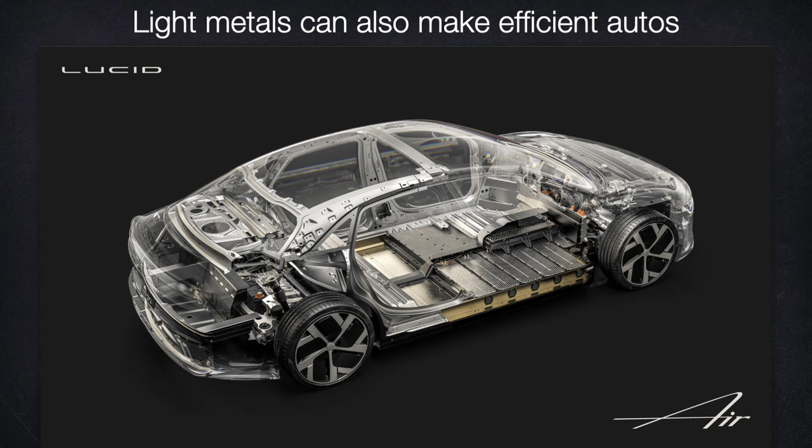Here's Lucid's Air model, the Motor Trend car of the year 4 years ago. It used a compact powertrain to help fit a spacious luxury interior into a mid-sized package. And because it's so efficient, EPA rated it a record 512-mile range with 0 to 60 mile an hour acceleration in 1.9 seconds. Can your gasoline car do that? Will your neck tolerate it?

Here's a developmental car Mercedes did 4 years ago, getting the equivalent of 252 miles per gallon. 95% battery to wheels efficiency, an excellent 0.17 drag coefficient, light curb mass, and the range was tested at over 1,200 kilometers, 747 miles, with a battery sized for a compact EV. The battery pack's 30% lighter, 50% smaller than in the comparable production model. This shows you how fast batteries are evolving with the help of electric race car technology.

So range anxiety will become as obsolete as the speed of your modem. And notice this sedan's mostly metal, so there's more efficiency and range on the table. Some of its powertrain is in this year's CLA electric luxury sedan. Sells for about $50,000, maybe the cheapest Mercedes on the US market, with just an 85 kilowatt hour battery.

Now the next efficiency leapfrog is emerging from a couple of solar-powered hypercars, both from little firms I've advised. They are now ready to mass produce, and the first one should enter production later this year. Most drivers will never need to recharge this two-seat electric vehicle because the solar cells on top capture enough energy to drive about 40 to 60 kilometers a day. It's as if your present car magically added 2 gallons of fuel to its tank every day you park it outside. To make a long trip, you can quickly recharge the tiny batteries with household electricity, and you can buy batteries for ranges up to 1,000 miles. Now, my BMW and Tesla electric cars are among the most efficient you can buy now, but this two-seat vehicle with a very crashworthy composite body will nearly triple Tesla efficiency to 343 miles per gallon equivalent.

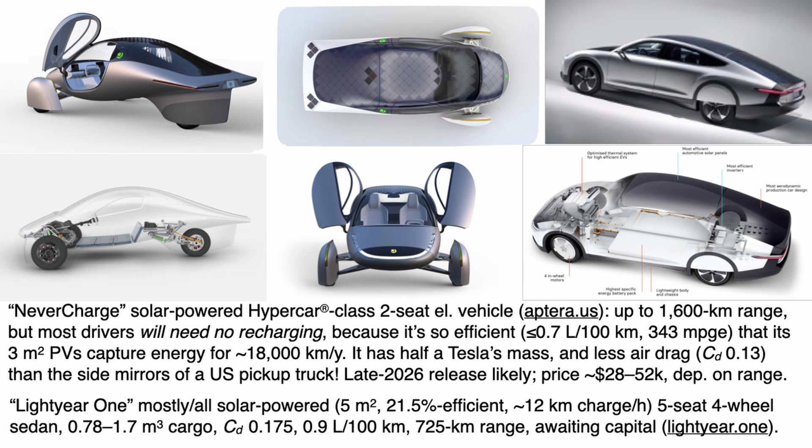Then there's the Dutch firm Lightyear, which got ready but not funded to produce this 5-seat, 4-wheel, light, very aerodynamic car whose 5 square meters of solar cells gives it 251 miles per gallon equivalent, so it can add 12 kilometers of range for every hour in the sun. So the charging infrastructure that others have to pay for, these super efficient vehicles aim to bypass. And even they can be further improved.

The 4-seat Edison 2, engine-powered winner of the 2010 Automotive X Prize, used in-wheel suspension. And for 4 seats, it weighed as little as 322 kilograms. That's about 3 times lighter than the Aptera on the left here.

What about aviation propulsion? In gas turbines, the National Academies expect several more decades of 7% per decade efficiency gains beyond the current roughly 55%. There's a lot of examples of that I won't go into, many of them involving 3D printing and some with geared turbofans. The best of these innovations is promising in the 2030s to use at least 25% less fuel than earlier engines. And yet, coming up fast in the outside lane are electric and hydrogen-powered airplanes, hydrogen-powered usually with fuel cells, as I'll sketch shortly. Many of these have long been in military use, and then they enter the civilian sector.

The maker of the most advanced always-aloft military solar airplanes and the Switchblade backpack portable drones for Ukraine is the same company that also makes my charger for my BMW EV. Now, Ukraine is evolving drones in days, and they're making many millions per year, defining the outcome of Putin's war. But those new techniques are speeding civilian innovation. Conversely, military drones grew out of Chinese hobbyist drones and used their high-volume parts. A commercial glider spawned an Air Force surveillance drone now operating in the Middle East, costing nearly an order of magnitude less than a Reaper drone, but carrying a 400-pound payload for 80 hours. So the civilian markets are big enough to drive rapid innovation.

In select U.S. cities, Walmart and Amazon are now using 70-mile-an-hour drones to deliver packages to your door, actually your front or backyard or driveway, in under a half hour. They just lower it down from 150 feet up and fly off.

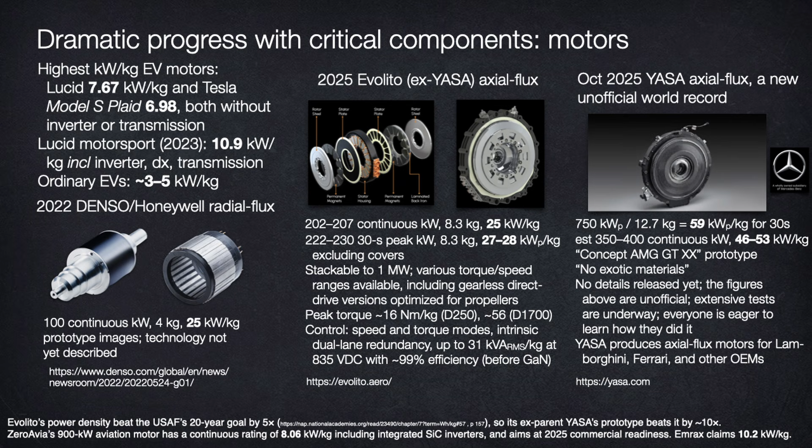Now look at the right. Last October, the firm that the founders sold to Mercedes, while keeping its aviation division, announced they just demonstrated an astounding 59 peak and around 50 continuous kilowatts per kilogram. Just try to visualize that. That's 3 to 7 times better than the radial flux rivals. And if you use that as a hub motor, that little thing gives you over 1,000 brake horsepower per wheel. What the hell do you do with that? It's going to smoke your tires rather than accelerate the vehicle.

So sleeker and lighter planes need smaller motors and batteries than these, but that just saves more weight, more mass, decompounding, and you're not suffering lower efficiency as you do when you make a gas turbine smaller. Top analysts now agree EPs will generally have lower capital and operating costs than fuel planes, and that will drive their rapid adoption in both commercial and private aviation.

By the way, lest you worry about critical materials, many fine light motors, both induction or asynchronous and reluctance machines, have no permanent magnets. And there are two kinds of supermagnets containing no rare earths. Of those, iron nitride promises up to twice the strength of the rare earth magnets, and that's entered the market.

Inverters are progressing from silicon switches through silicon carbide, now common, to nearly lossless passively cooled gallium nitride, or GaN. Kilovolt silicon carbide switch ratings now make wiring small and light. So remember that Lightyear Dutch car? That has a 97% efficient powertrain, 2 points ahead of Mercedes. The best e-racing motors and inverters each get around 99% efficiency.

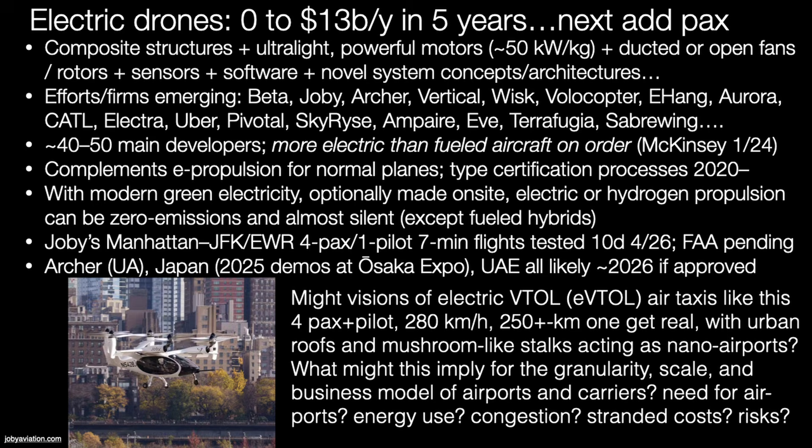A year and a half ago, McKinsey estimated a future air mobility order book, not all of it firm, exceeding 21,000 odd aircraft worth $118 billion. That's more than the aircraft in the commercial aviation order book. Bloomberg last July counted 21,000 electric aircraft orders, most conditional. FAA last year estimated advanced air mobility departures could rise to about 7,700 daily flights in year 6. And already over 9,000 electrical vertical takeoff and landing, or eVTOL, air taxis, millions of drones, military R&D are enriching the electric aviation ecosystem.

Joby, which some of my students work at, are planning an eVTOL taxi service this year from downtown New York City and LA to JFK, Newark, and LAX airports. That looks on track, and they price it at the lowest helicopter fare with as little as 1% of the noise. Prices by 2030 could match the premium car fares you pay now in Uber.

Joby last quarter had $2.5 billion cash and a $10 billion market cap. It's in the last stage of FAA approval for its vehicle and for Delta, ANA, and Virgin Atlantic sponsored Uber integrated New York airport service. Archer, another leader, hopes to start serving United this year in New York and Chicago with eVTOLs. Stellantis produces its vehicles in Georgia. United has put deposits on 200 of them.

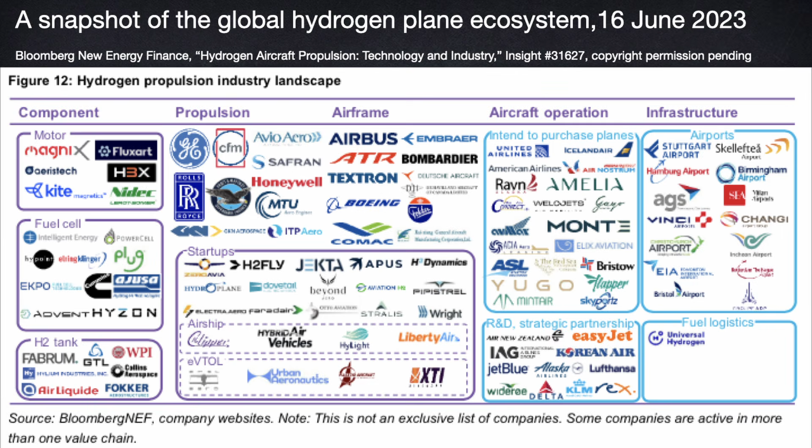Or consider these counterparts in the hydrogen plane ecosystem. Now, to be sure, Airbus just slowed down its hydrogen plane program by 5 or 10 years, but mostly on infrastructure. And as we've seen, tenfold carbon savings offer juicy economics without hydrogen.

Hydrogen does get easier as planes get far more efficient and hydrogen production gets decentralized. So I think it's pretty likely that incrementally minded incumbents and commentators are deceiving themselves and likely to miss their flights. The big question is how far hydrogen can carve out and defend markets against ever stronger electric competition that's already shrinking its use cases.

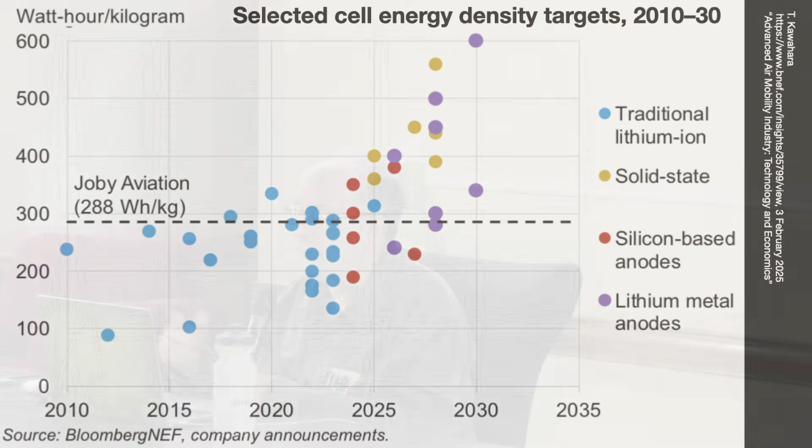Of course, top of mind for seekers of flight without fuel is battery energy density. At least 3 firms have doubled the smartphone pouch cell's energy density to 400 or 500 watt-hours per kilogram. That's about 3/4 of the pack density that the Academy said in 2016 would take 20 years. Looks like they're about a decade off.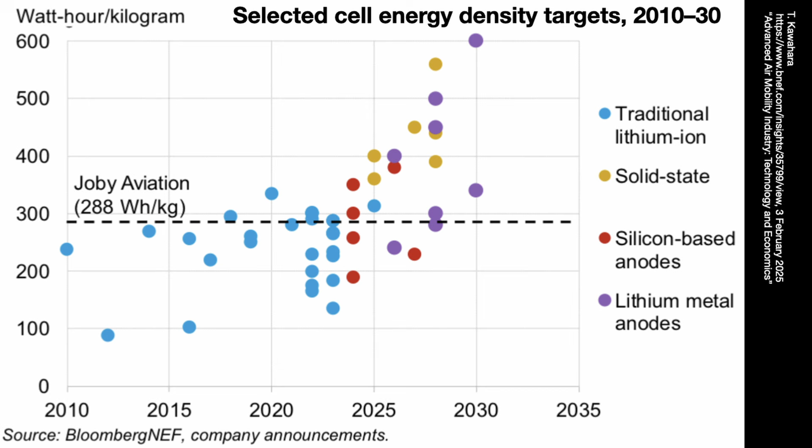Several solid-state battery firms are now claiming cell-level 700 or even 800-plus watt-hours per kilogram on the lab bench. And increasingly, that's integrated vertically with electric aircraft design.

Think of the Chinese lithium battery giant CATL. 3 years ago, they announced a condensed battery with cell energy density 500 watt-hours per kilo. And they also mentioned their partnership had tested a 4-ton electric civil aircraft. They expected in the next year or 2 from now to release an 8-ton version with 2,000 or 3,000 kilometer range. Well, that kind of company can move real fast.

And indeed, initial uncrewed heavy lift eVTOLs with 400 to 800 kilo payloads, 200 kilometer an hour speed, and 200 kilometer range are today built, certified, and commercially hauling freight in China.

But as the NASA authors I began with noted 12 years ago, 500 watt-hours per kilo at the cell level enables short-haul electric planes immediately, moving into medium haul starting in this decade. And also, as Chalmers in Sweden has shown, you can do carbon fiber structural batteries.

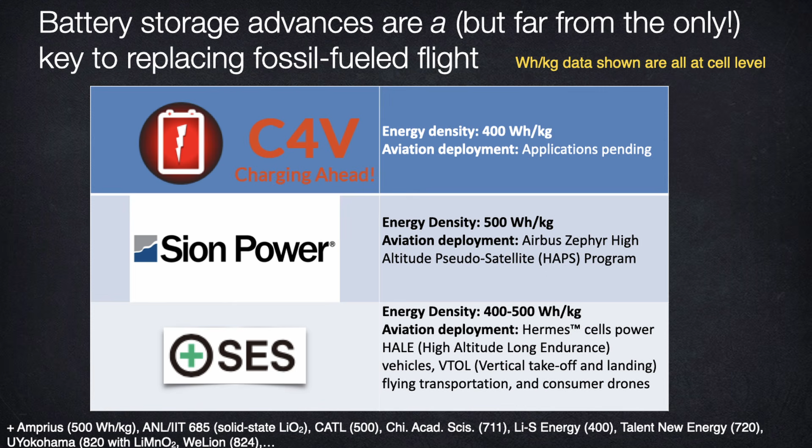Large area batteries or ultracapacitors or both that eventually form the airplane's skin and structure while storing electricity, and the battery stiffer than aluminum, which must be pretty stiff because we use it right now for airplanes.

ARPA-E has a Propel 1K program aiming for 100-passenger, 1,000-mile electric aviation, and they've funded a dozen teams developing 1,000 watt-hour per kilogram and per liter net energy storage systems.

Already, lithium metal anode batteries are offering twice traditional lithium-ion energy density, and some production models are better. As we saw, battery energy density is fungible with platform efficiency, only more so because of mass decompounding. So especially with some of the high-density sulfur-selenium packs, it looks like you can get 280 kilometers with 90 passengers, but if you reduce the empty mass fraction of the plane, you nearly quadruple market coverage, or get a 15-fold increase for turboprops. So the key is really platform efficiency more than batteries.

Now, I'm nearing the end here. I know it's long, thank you for your patience. But I've been riffing back and forth between the aviation and automotive revolutions because they inform, supply, and feed on each other.

Planes do go faster than cars, so is their innovation. And in both, the major drivers of innovation may lurk outside your system boundary. We have EV batteries today because mainly smartphone makers strongly incentivized battery life. That drove advanced lithium chemistries and efficient circuits. That made EVs possible, so Tesla built volume and made batteries cheap. Then our smartphones birthed our electric cars via consumer electronic companies like Panasonic and LG. What new drivers of electric aviation by non-adjacent industries will be obvious only in hindsight?

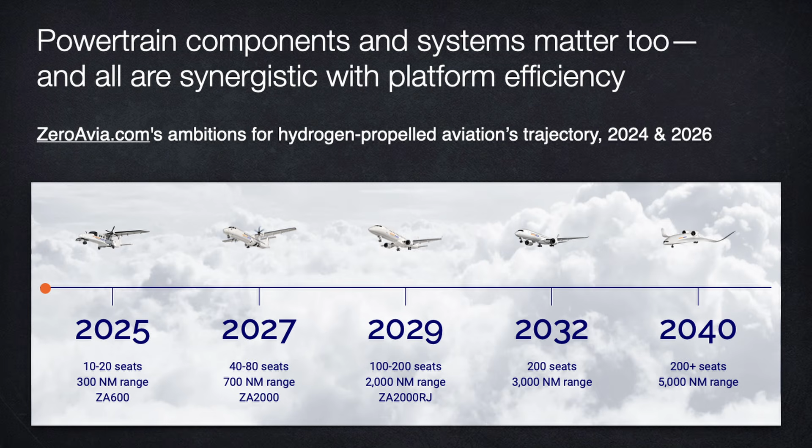A couple of years ago, Joby demonstrated a liquid hydrogen fuel cell eVTOL, 454 nautical miles with 10% reserves. 5 months earlier, Bertrand Piccard announced a round-the-world 9-day nonstop flight planned for 2028 on liquid hydrogen. And the fuel cell planes are dramatically more reliable and lower maintenance costs than fueled engines. With hydrogen, as with electric flight, it is really unwise to stand with your back to a stampeding herd of technobison.

Let me end with a few observations about intercontinental range. I won't dwell here on turbine or engine hybrid designs. They could have a transitional role, much as they did in cars. But automotive efficiency took us to once unthinkable solar-powered cars, Aptera. I think similar and inexorable trends are emerging in aviation.

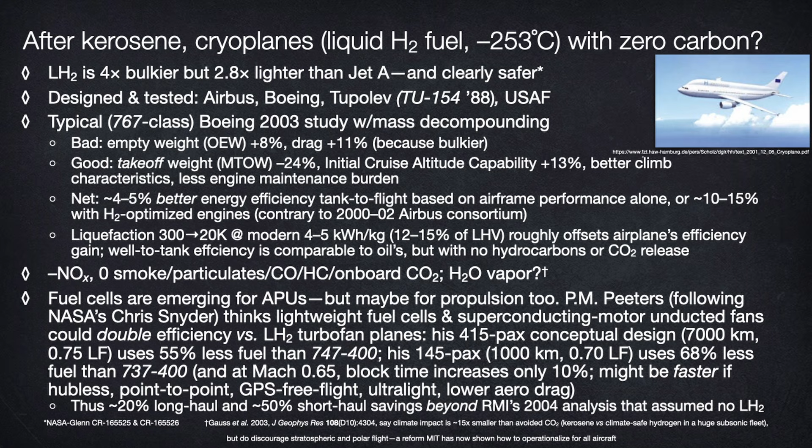Now, the conventional fossil-free solution is obvious: liquid hydrogen. There's been a lot of good work on that. Hydrogen is 2.8 times lighter than jet fuel, 4 times bulkier, so you need a whole new airplane design, but it could be more efficient than Jet A, enough to offset the liquefaction energy. And I've seen automotive cryogenic tanks with walls just millimeters thick. So a lot of exciting opportunities here to raise airplanes' established 3 to 5-fold potential efficiency gain to about 6 or 7-fold, or with the lighter motors and better aero, probably now over 8-fold.

In case you were wondering, liquid hydrogen is safer than Jet A for a lot of reasons. If the hydrogen escapes, it does not explode and it doesn't pool like kerosene. Rather, it diffuses and burns upwards with a brief, clear flame that cannot burn you at a distance. That's why nobody in the Hindenburg dirigible disaster was killed by the hydrogen fire. They were only killed by jumping out, or by the diesel fuel fire, or by the ignition of the canopy made of flammable cloth coated with powdered aluminum. It's what we would now call rocket fuel. Not a wise choice.

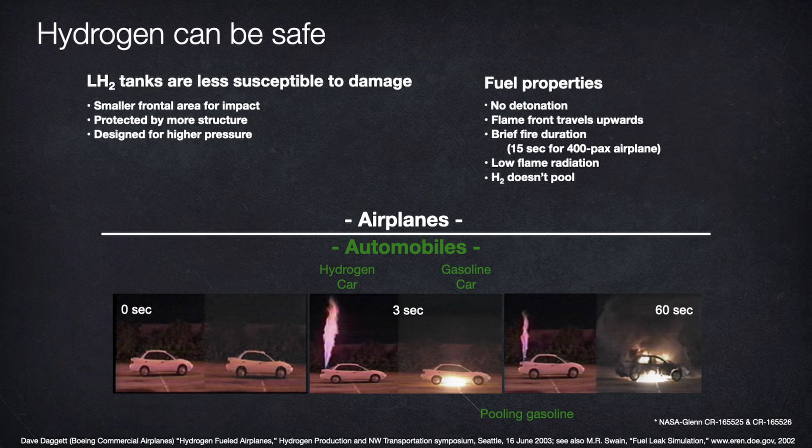So here's a side-by-side worst-case test of deliberate hydrogen release: on the left, draining a high-pressure gaseous hydrogen tank in a car at the highest possible rate in about 100 seconds, compared with on the right a small hole leaking gasoline holding 60% less energy. You can only see the hydrogen flame because there's salt in the sea air where this was tested. But the hydrogen flame radiates so little heat it barely warms the outside of the back window. The gasoline fire quickly turns into a barbecue.

I would much rather have a hydrogen fire, but to start it you would need not a single tank hole, but the simultaneous failure of the fuel line plus 3 independent safety devices.

Recall how radical automotive fitness enables all kinds of advanced powertrain, as in our Revolution carbon fiber SUV, using an early fuel cell and 1990s off-the-shelf carbon fiber tanks that could easily carry hydrogen up to 10 or 12% of their filled mass.

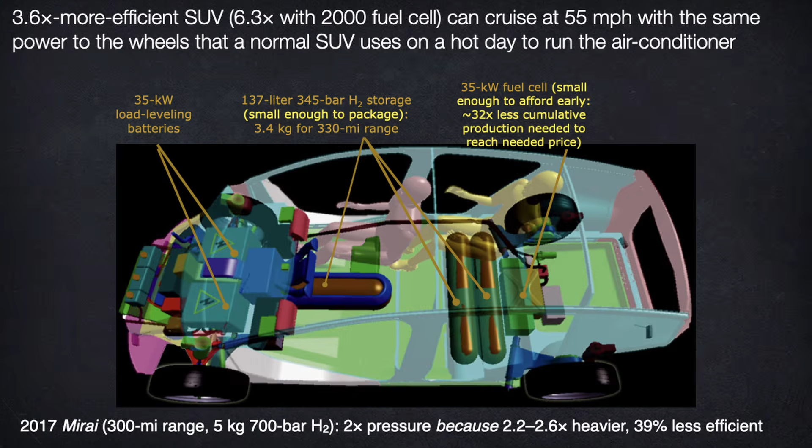Well, Toyota's Mirai hydrogen car needs 700 atmosphere tanks, twice as much pressure as these. It's awesome that they've doubled the power density and made the fuel cells 95% cheaper in 9 years. But they could have made those systems 2 or 3 times smaller by putting them into Toyota's 1X carbon fiber concept car you saw, instead of the Prius 5 platform that's almost 5 times heavier.

And indeed, in our design, our SUV's efficiency made its fuel cell 3 times smaller. That means you can pay 3 times more per kilowatt. At a standard 80% experience curve, you would then need 32 times less cumulative production volume to get to competitive cost. So that would speed the hydrogen transition by a decade or two.

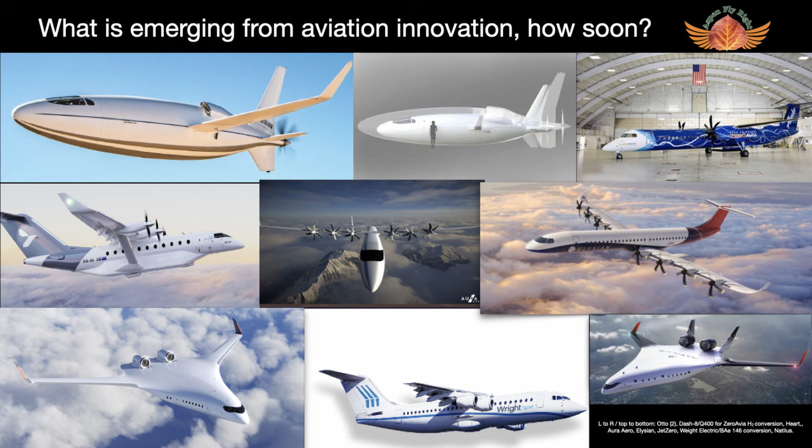And I think with or without hydrogen, the same logic applies to efficient planes. Here's just a little petting zoo of some of the ultra clean and super efficient planes coming at us. They're still just targets promised to investors. Some specs, some dates will slip, but there are so many and so capable firms, I think they're unlikely all to fail. These are just a quarter of the industry plans I examined, which are a fraction of the total, and many are not yet announced.

Remember that as Paul MacCready's AeroVironment team progressed from the human-powered Gossamer Condor in '77 to the Gossamer Albatross human-powered flight across the English Channel in '79, to Solar Challenger, the first solar-powered distance flight. At the same time, MacCready was hatching the Sunraycer solar car. It was so efficient, it won the first Trans-Australian solar car race in 4.5 days, 2 days ahead of the nearest competitor. So his breakthrough planes and cars inspired each other.

Super efficiency can enable electric planes just like electric cars. And that's happening faster than you might think.

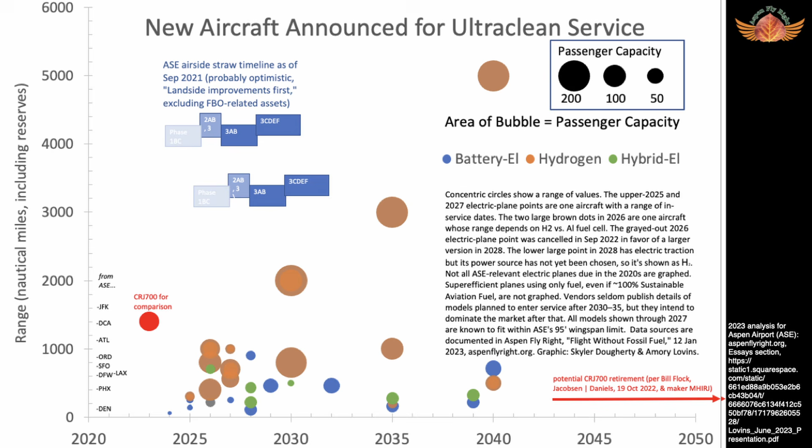I'm going to skip this eye chart, which just shows how in the airport near where I live, Aspen, Colorado, they're imprudently planning a $1 billion rebuild of the airfield for bigger fossil fuel planes that would all get built right around when those planes are likely to start getting outcompeted by efficient electric planes that they're carefully not looking at.

But if we buy enough efficiency, hydrogen electric and battery electric are no longer the only choices for planes any more than for cars. Could we imagine a flying analogy of the solar-powered, battery-buffered, super-efficient Aptera car? So that's my last 3 slides.

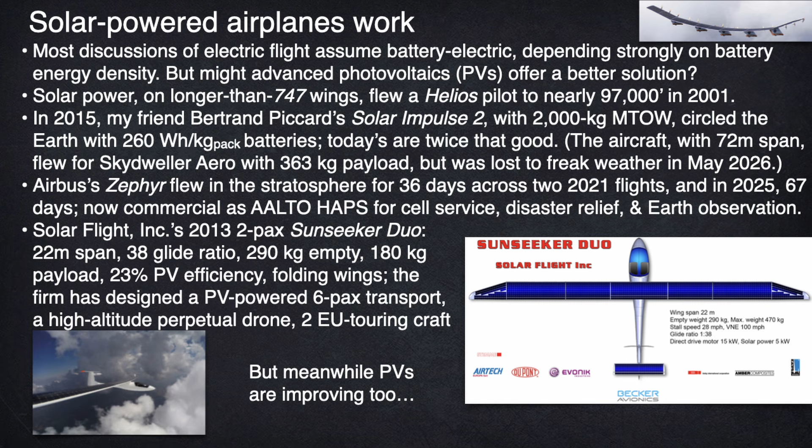Solar-powered flight already works daily in many military and a few civilian platforms. Photovoltaics took a pilot far into the stratosphere in 2001. In 2015, the solar-powered Solar Impulse 2 circled the globe on solar power, buffered by batteries half as good as today's. Airbus has commercialized a solar-powered platform designed to stay aloft for 200 or 300 days.

Solar Flight's latest 2-seater can stay up as long as there's sun.

And don't forget the simultaneous revolution in the photovoltaics themselves. With concentration, we're now at 47.6%. For little ones, we could probably get over 50. But without concentration, like on an airplane wing, a 3-junction cell has been measured at 39.5% around sea level.

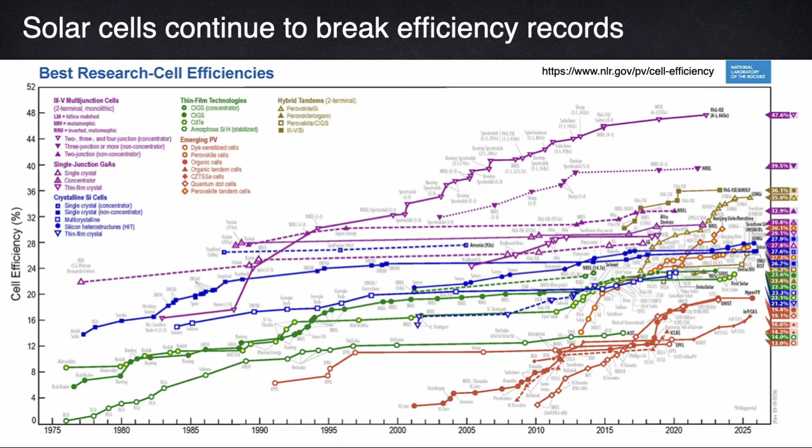But at cruise altitude, there's 20 or 25% more sun, and there's nearly as much reflected from Earth and clouds below as captured from the sun above. So you put the coating on both sides. The temperatures are around minus 60 Celsius, making the cells more efficient. You also reduce absorption from oblique angles of incidence, but on balance, net efficiencies at cruise can be very high.

And today's chip-making tools may also be able to lithograph flexible optical antennas and optical frequency nanodiodes with system efficiencies upwards of 80%. Some people think 90%.

Until then, PV cells are costly, but generally less so over the years than fuel, plus the fuel to carry it. And the cells, carefully encapsulated so they don't break from flexing, are very lightweight. So are super efficient GaN power electronics. So platforms like Zephyr prove the power of combining such solutions.

So, returning to our earlier question, can we make an electric plane like an Aptera electric car so efficient it doesn't need recharging?

Well, I suspect we can if we combine the best proven methods of ultralight construction, super efficient powertrain and photovoltaics and buffer batteries, advanced and biomimetic propulsors, ambitious aerodynamics, combined with advanced treatments to keep surfaces clean and smooth, super efficient accessories and HVAC, virtual windows, far lighter landing gear and techniques, and other innovations. Do numerous recursive mass decompoundings until you're doing almost everything with almost nothing. Repeat until done. I'd like to do this massive synthesis in one giant leap, because all the parts exist.